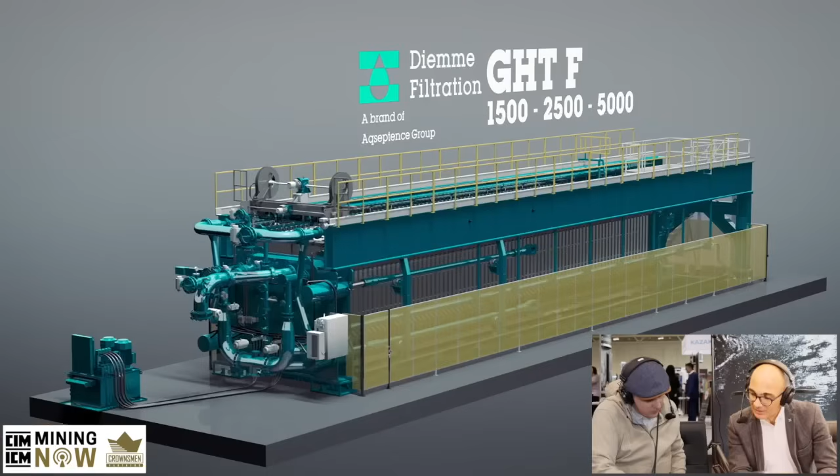Well, the most sold unit, the best seller, is now the GHTF. Is that this line here? It's this line, where the GHTF stands for fast.

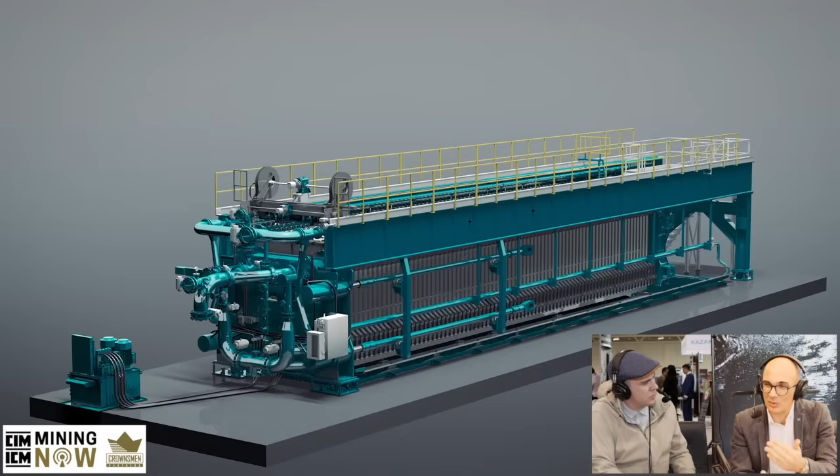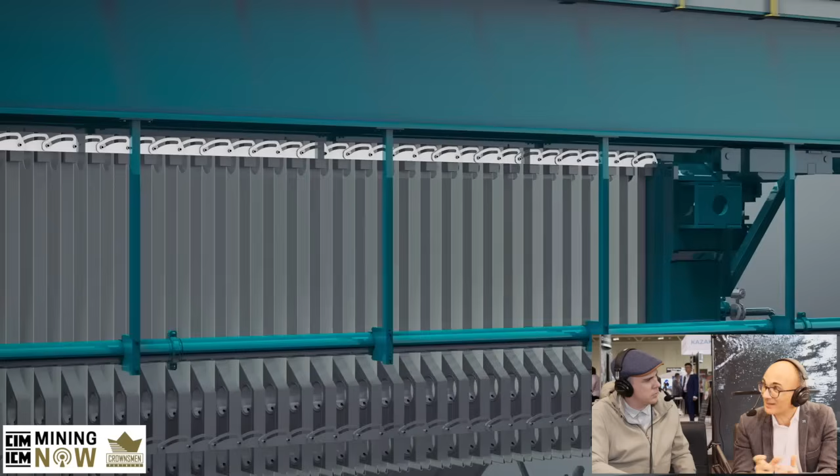And fast is something we needed to have in our equipment, because in applications like mineral concentrates filtration or fast filtration tailings, any possibility to reduce technical times means that the filter press, which works on a batch basis with cycles, can work with a higher capacity. So that's what we specifically designed to go with high production, heavy duty, fast cycles that you can repeat 24 hours per day.

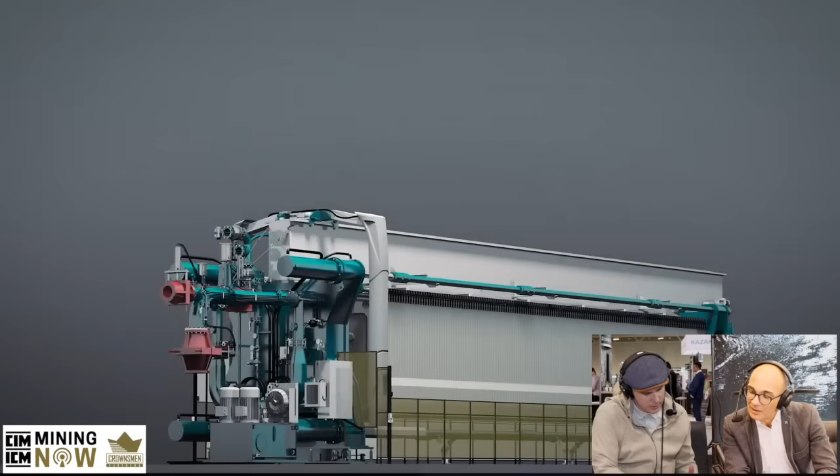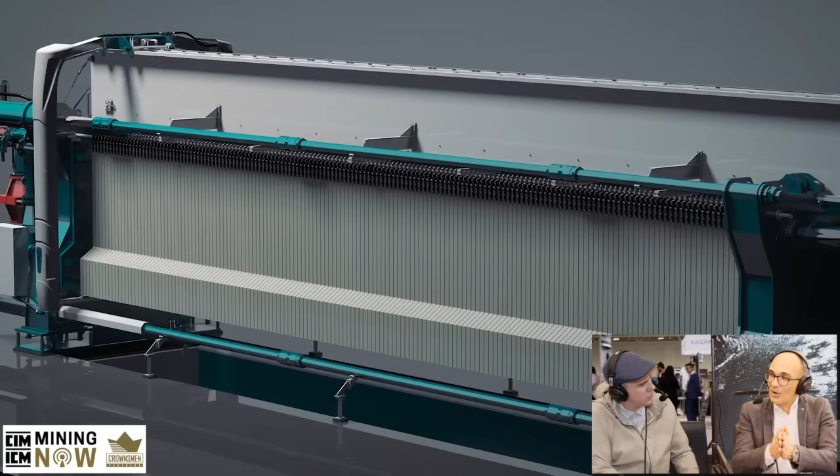So what would be the difference from the GHTF to the GHTP? The GHTP is having some characteristic of the F, meaning we have the 4 cylinders pull to close, which is a design enabling reliability cycle after cycle. But the F is opening the plates, we say accordion style, in a kind of simultaneous opening.

The P is moving plate after plate with a system we call the carousel. We use that model when the cycle time can be a little bit longer. But even the GHTP is one of the most used models in the mining industry. That's a full scale model, up to 2.5 meter plate size.

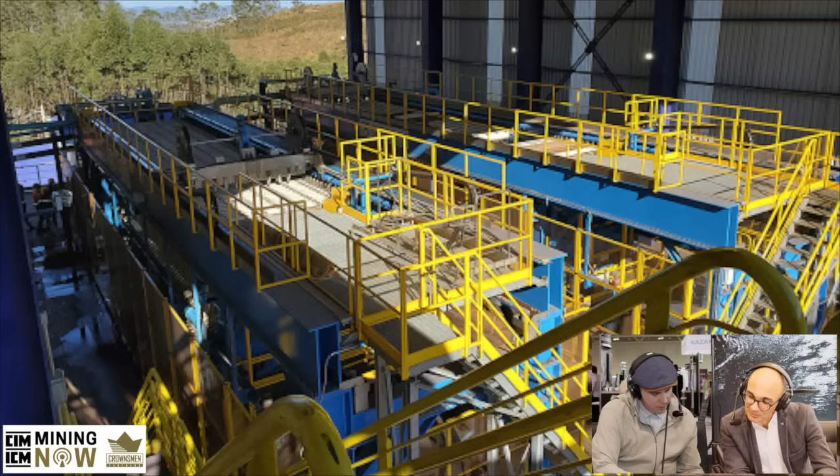So a large mine, how many units of either the GHTF or the GHTP? This picture of the GHT 2500F looks like just 2 units. The other one, the GHT 2500P, looks like there's 7 units. So would that be a huge production, or is that not even as big as they would go? Well, it's a huge production.

This is an installation we have in Australia in red mud filtration, which is, by the way, one of the industries where we have the largest amount of references. I think red mud is one of the most important applications for us.

Sometimes even the GHTF is common to deliver in groups of 5, 6. Recently we are assembling a plant in New Caledonia where we have 9 of these units. I think so far it should be one of the largest tailings installations, with the capacity of more than 30,000 tons per day.

And again, I love that you have pictures and videos and stuff, because even if the audience knows it, it's just not the same if you can actually see it. People right now are seeing it come up on the screen and they're knowing what you're talking about.

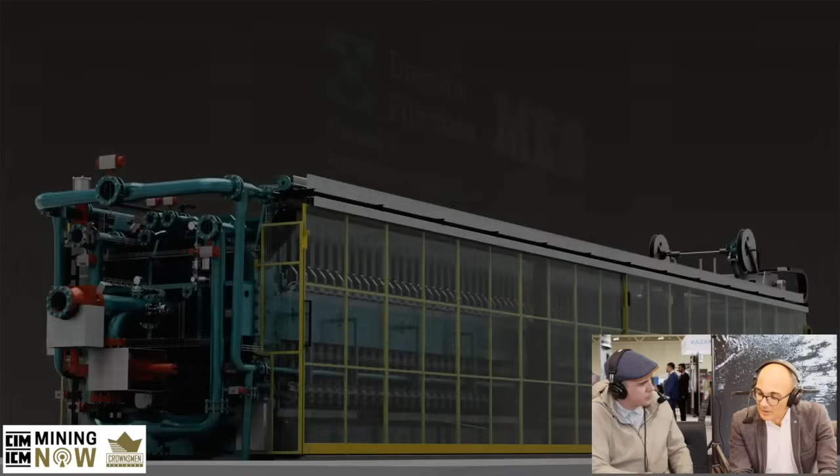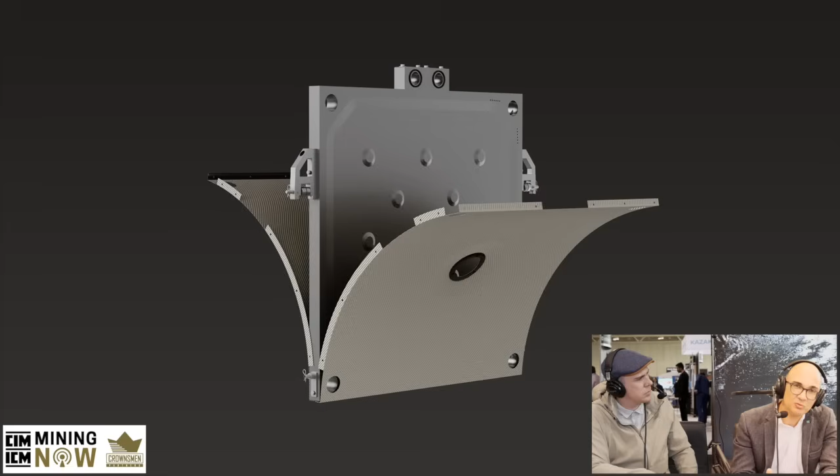The ME2000, where does that fall into things? The ME2000 is a unit we developed for some tailings applications, maybe medium duty. Sometimes we see applications where the capacity might be something like 2,000-3,000 tons per day, and the client is ready to invest, but not such a huge amount of capital equipment.

The ME2000 fits exactly in that segment of the market where you have automation, you have a simultaneous opening, so heavy duty, but at the same time trying to minimize the capital expenditure of that unit.

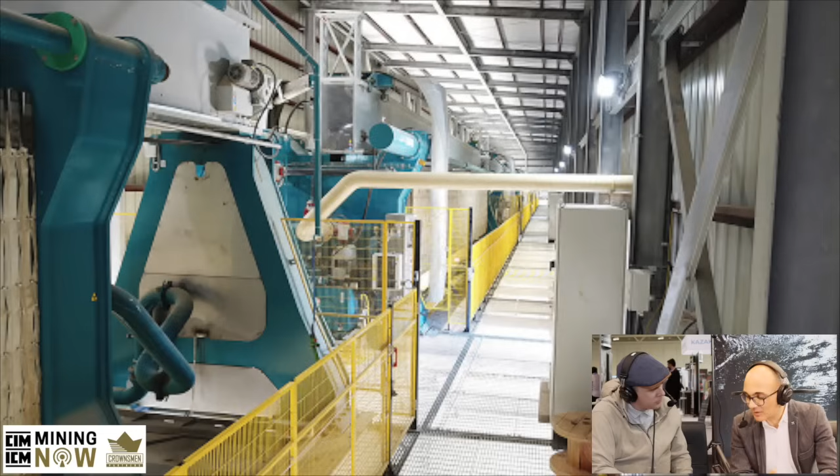And then let's quickly go. So you've got the GH2P. Yeah, this is the GST2000, in the family of the GSTP we mentioned before, but this model is used other than in mining, also in the quarry business, in the aggregates industry, where the clients are producing sand and gravel, and the washing is generating fines.

So is this not more heavy duty, but more for abrasive material then? It could be for abrasive material, but also some silty slurry, where the fine particles take a little while for filtration. This performs very well with silty material in the quarry industries, and we have a variety of references all over the world of these models in operation.

So would this be an example of the other 20%, because technically it's in the aggregate space, or do you consider it still in the mining space? It's a kind of borderline. Sometimes it could fall still in mining, sometimes not. It depends on the final product of the quarry.

You had one other, let me just see here. I wanted to get, so we already talked about the GHT, but now there's a domino. Oh, so the GHT-F domino. Yes, you are bringing on the field our big boy.

So this is the unit, the largest filter press in the world. It's a model deriving from the GHT-F line we presented before, but we took it to the next level, to the 5 meter by 5 meter size. No one else has this model available now in the market, because it's the largest that is available. The size of the plate is 5 meter by 5 meter.

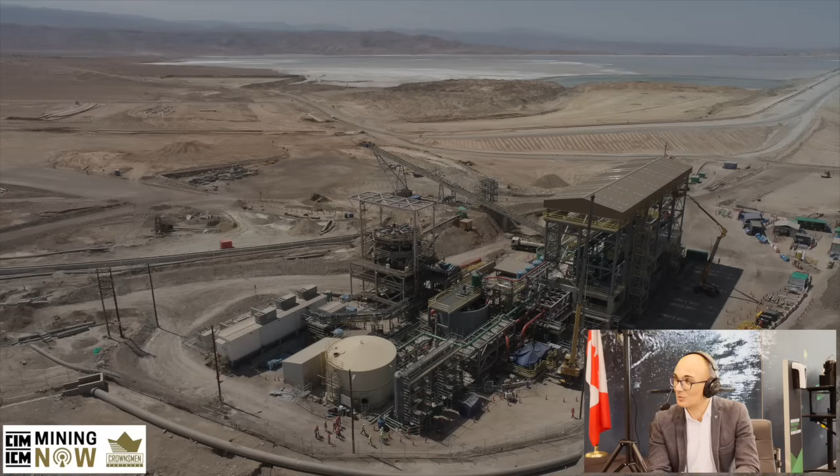It can have a total filtration volume of 71 cubic meters, and a surface which is almost 3,000 square meters. That is a consequence of our approach to the market. We started before talking about the lab, working hand in hand with clients. So listening to the needs of our clients, we found in the recent 5-6 years that the capacity of the tailings installations were becoming higher and higher.

There was a need from clients to reduce filtration lines. Instead of going with 35 lines of 2.5 by 2.5 units, they wanted to reduce it, maybe to only 7, 8, or 10 lines of 5 meter by 5 meter. So we were able, with lab people, mechanical engineers, and electrical engineers, to design and develop this Domino, which is its name. We are really proud of it because we launched it with a big event in November 2021, as a live stream online, and it was a success.

I want to get into AIDA, but before that, I just want to touch on thickeners since we've talked so much about filters. We do thickeners as well, some of them big units. We have different models of different sizes, customized according to the needs. We found this very important because the filter press comes right after the thickening application.

We found that sometimes having the combination package with the thickener and filter press optimizes the overall performance of the system. So we have this available in the market, with some installed in the US, some in Eastern Europe, in Latin America. It's a growing business as well.

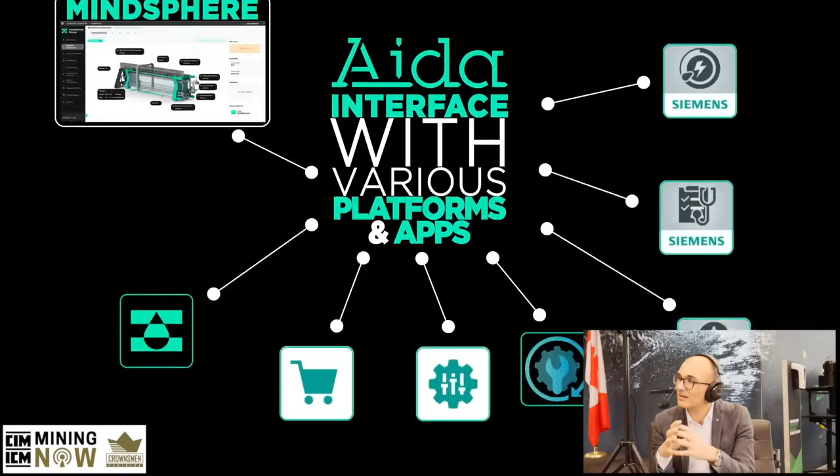AIDA is not the future, it's already the present. It's a new approach to the market - no longer just a product, we're talking about a service now. Our company used to do business only with products and systems, and Domino is of course the latest innovation. But even AIDA is revolutionary because it's a service providing real-time monitoring of the systems we've installed all over the world, sometimes in really remote areas.

For example, the first Domino now in operation in Peru, in a copper mine, is equipped with AIDA. We are accumulating data in our company, where a team is analyzing this data, monitoring it, and providing feedback to the client to prevent issues, optimize cycle time, and monitor the KPIs. So it's a kind of technology with IIoT and artificial intelligence bringing data to us, and our team - there's still a human touch - will give back to the client the value of something that's taken care of and optimized with a 365 days per year service.

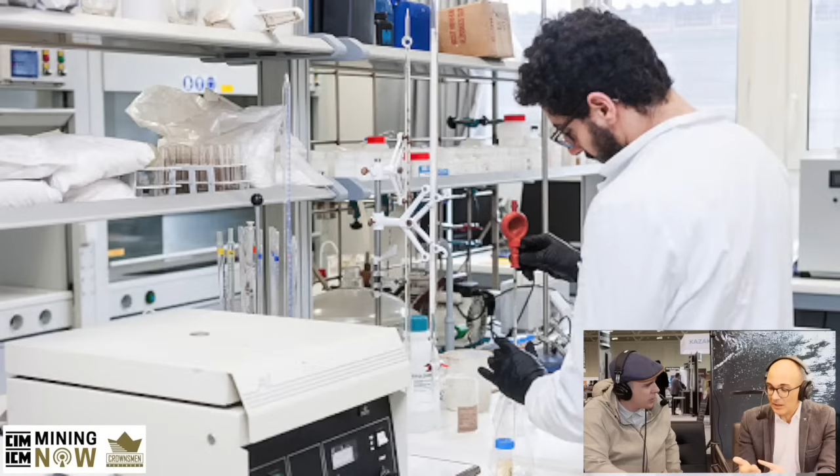It's sort of bringing that R&D side around to right now, with all that technology - R&D, process expertise, and we now have a data scientist on the team, which you couldn't imagine maybe 10 years ago for our company. This team is a combination of expertise, and these people will be involved in servicing clients all over the world.

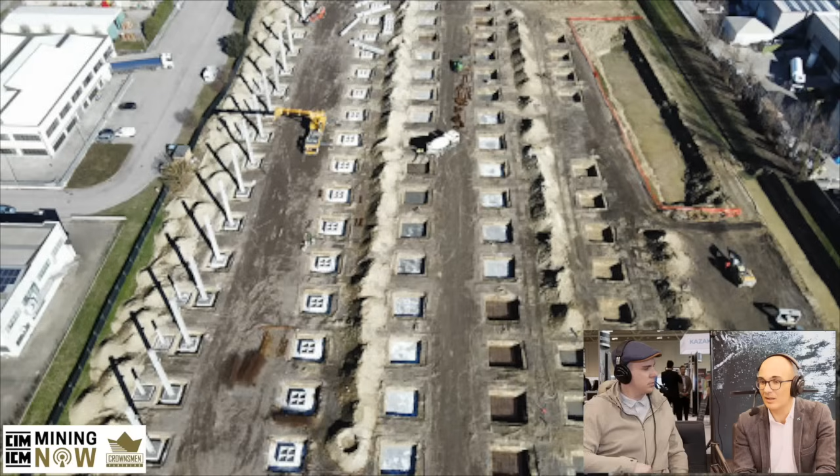The last question I wanted to ask about was your growth - are you opening a new manufacturing plant as well? Yeah, beside our existing facility, we are now full speed manufacturing, creating a new facility. We are doubling the capacity of our factory with the new facility right beside the existing one, and the plans are to be up and running by the end of third quarter 2023.

So there's a lot of excitement to punch out all those Dominoes. Yeah, there's a big demand for this and we need to be ready to serve the market when they need it. That's why we reacted in this way.